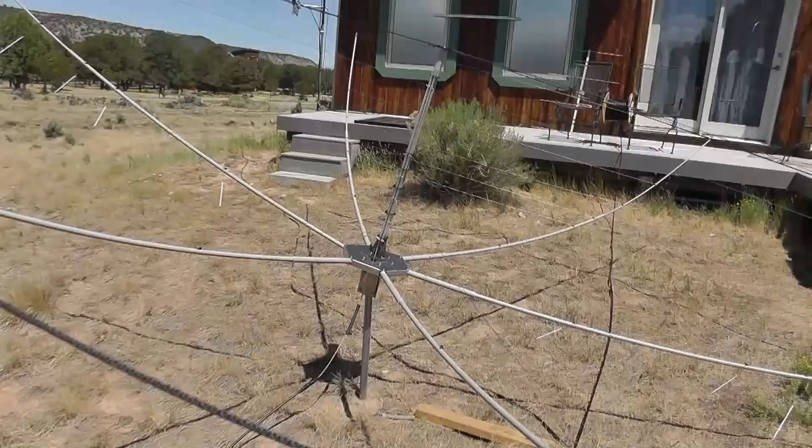Okay, so here's the antenna on the assembly stand. I've got it right here. It can rotate around. The feed point is right down here, and there's a transmission line that goes up the length of the antenna, and we start with the 6 meter, 10 meter, 12 meter, 15 meter, 17 meter, and 20 meter. Up here at the top we've got spacer cords that keep the ends pulled up.

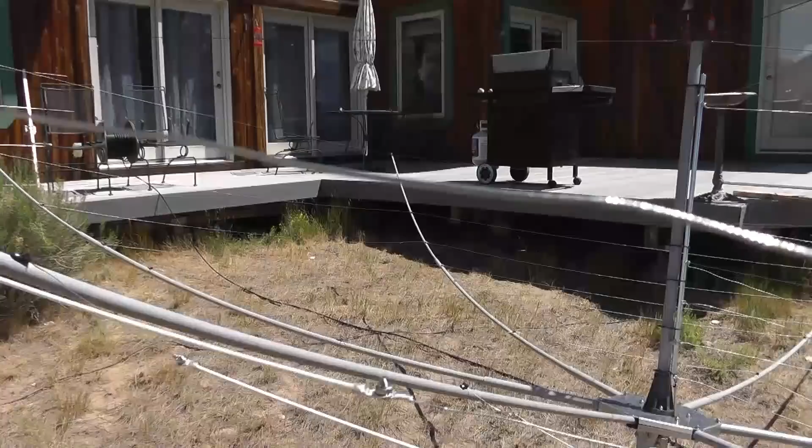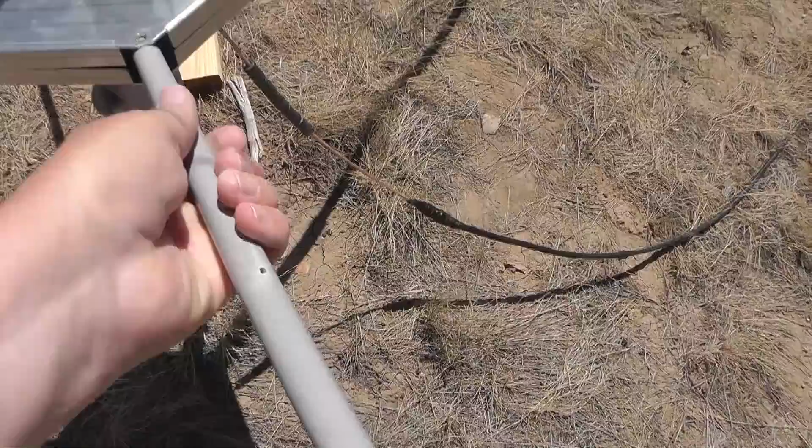Now the way these wires go is over here to the spreader element. Then from there are these insulators. Let me get up closer. Here's some insulators right here that are pre-made to the right length. And then over here is the reflector element. Now this thing is broken. I managed to break it off. See how this spreader arm comes in here? Well, it's supposed to come in here too, but that part is broken off. So I have a fix for that, and I will implement that.

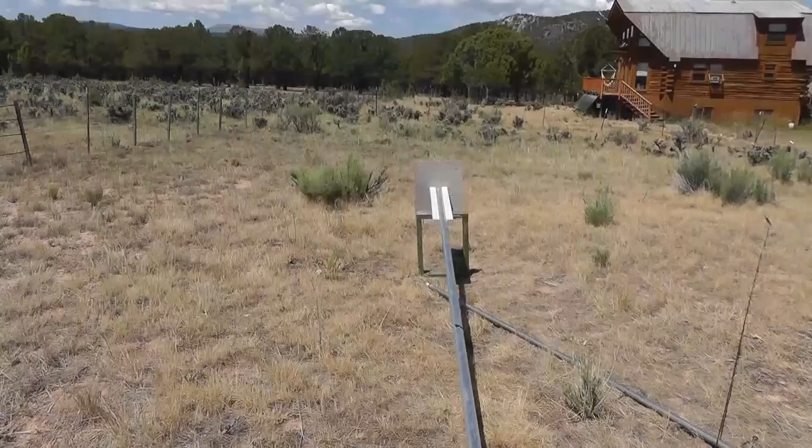In the meantime, here's the mast I'm going to put it on. That is a 20-foot long piece of Schedule 40 pipe with a 1.5 inch inner diameter, and I got the heavier aluminum, and it's all one piece, 20 feet long, so that it would hold up the higher weight. And what we have down here is a base for it.

Note the bolts. We can leave the top bolt in, take the bottom bolt out, and then it will swing up. So we put this on the ground, and with these 3-foot stakes that we have, connect that to the ground, and then the element folds down. We can put the antenna on it and then lift it up and get the guys in tight. So that is the plan as soon as I get the antenna fixed.

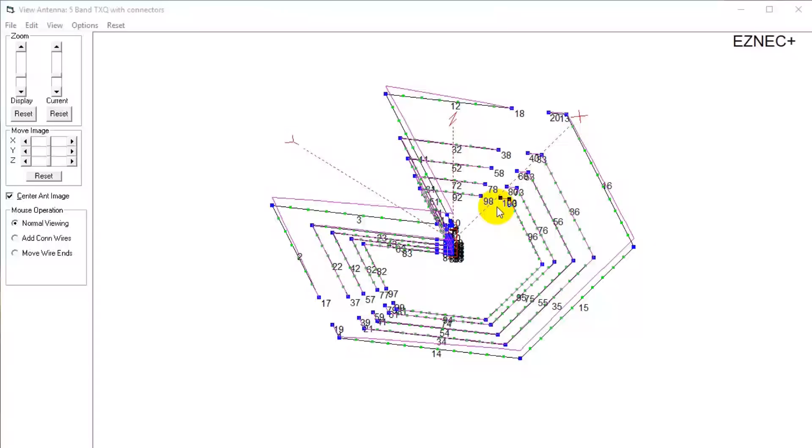Let's look at the overall model in EZNEC for the thing. You can recognize the pieces here. If I put this up here, like this, there. Okay, you can see the driven elements all follow this spreader out until they get to their turn point, and they come over here some distance away from the reflectors. These are the reflectors, so you can think of this as kind of a V shape, and these as sort of a U shape.

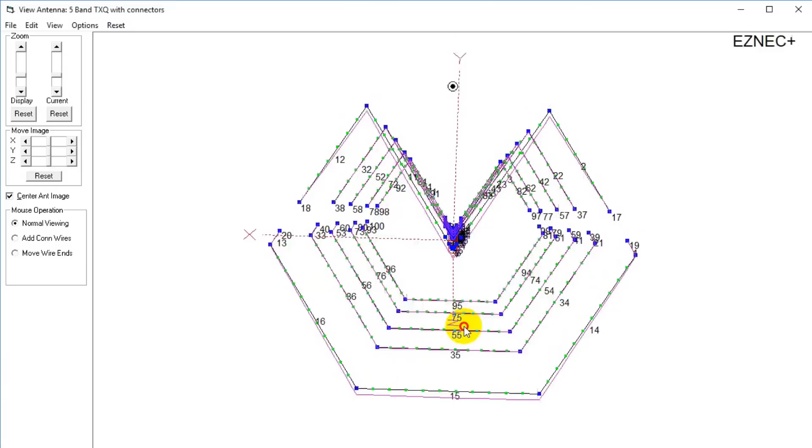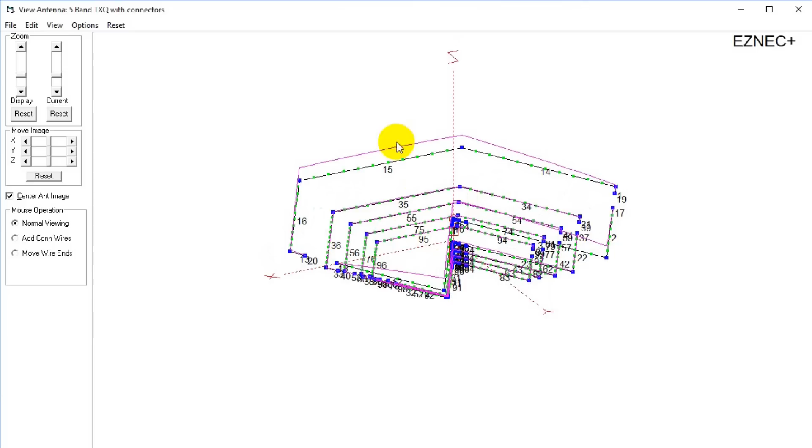Okay, and as we look at this antenna, you can see that the smaller loops are on the bottom of the antenna. Now that pink line right there is the current that's in this top element here, and it just shows that it's at most right here in the middle where you would expect it to be, and it is also highest out here in the reflector. So each driven element is on the same level with its reflector. Now there's not 6 meters on here. We've got 20, 17, 15, 12, and 10. So 5 bands right here.

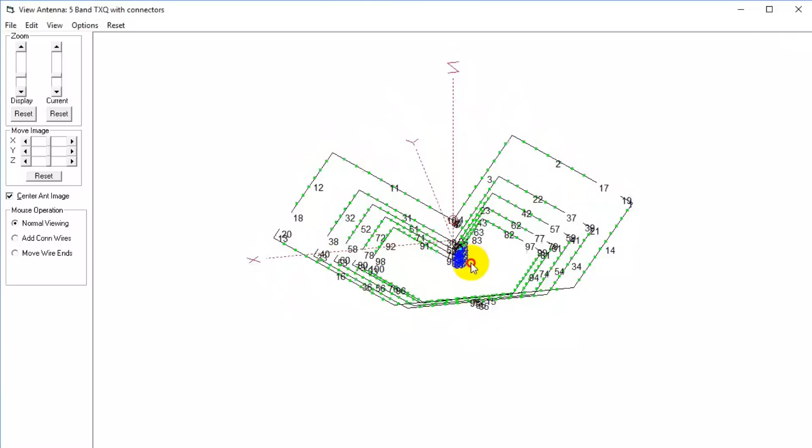Now we can look at various things about this. What I want to do is look at the SWR first for each of the 5 bands that's modeled here, and the elevation and azimuth patterns for each of them. We're looking at the radiation pattern of this antenna on 20 meters.

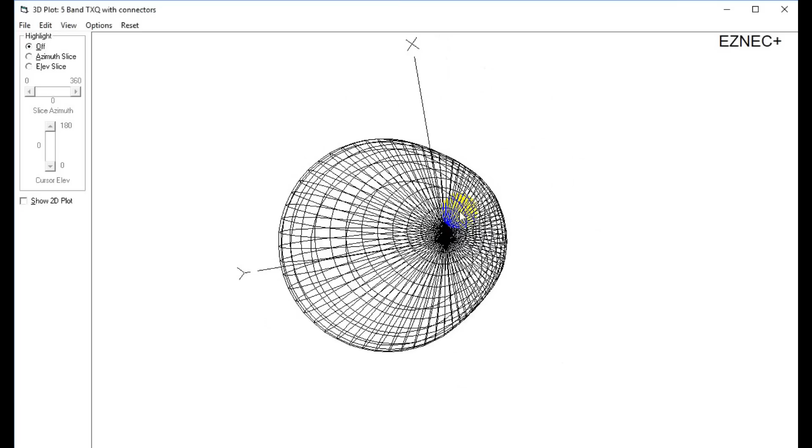Note that there's no weird side lobes or back lobes. There is a back lobe and a side lobe. You can see them here, but they're very smooth. I've never seen an antenna with such a smooth pattern. Note that the radiation does tend to go up. We're going to find that the peak is somewhat right in here.

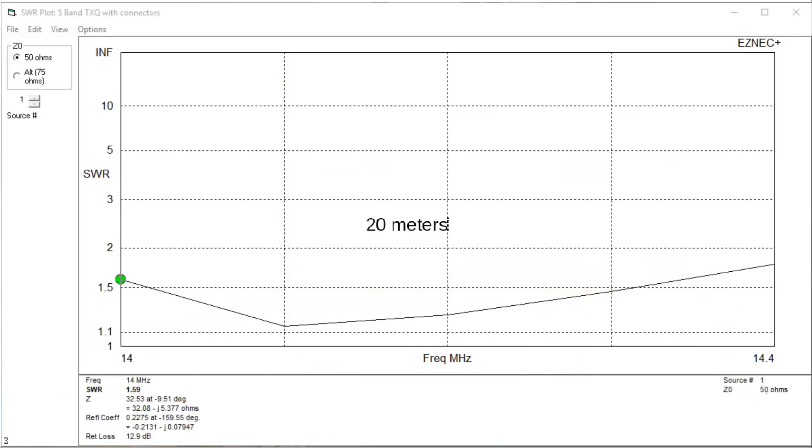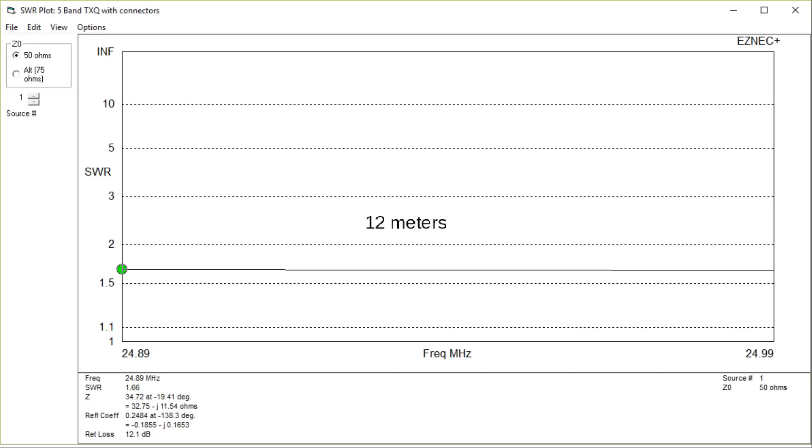So here's 20 meter SWR. It's below 2 to 1 across the band. 17 meter is very low. 15 meters is also very low across the entire band. 12 meters is very low. It's lower than 2 to 1. It's not less than 1.5 to 1. If you wanted to, you could use the built-in antenna tuner to touch that up.

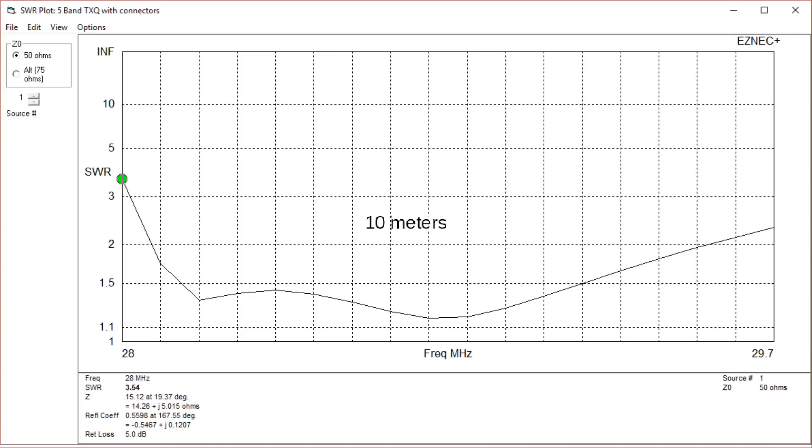10 meters is a very wide band, 28 to 29.7. The parts that are commonly used, which are 28.3 to 28.5, is where you'll find a lot of SSB activity, and a little bit from 28.5 to 28.6. And the SWR for that section is excellent.

Now let's look at some of the elevation and azimuth. Let's go back to 20 meters. We see that we have this nice rounded potato shape elevation pattern. The elevation pattern is high, like it would be for a dipole. Now we're at 20 feet, okay? The model is at 20 feet, and that is what I'm going to be erecting, a 20-foot mast. So we'll see how all of this comes out. So 20 meters optimum would be about 33 feet, but we don't have that in this case.

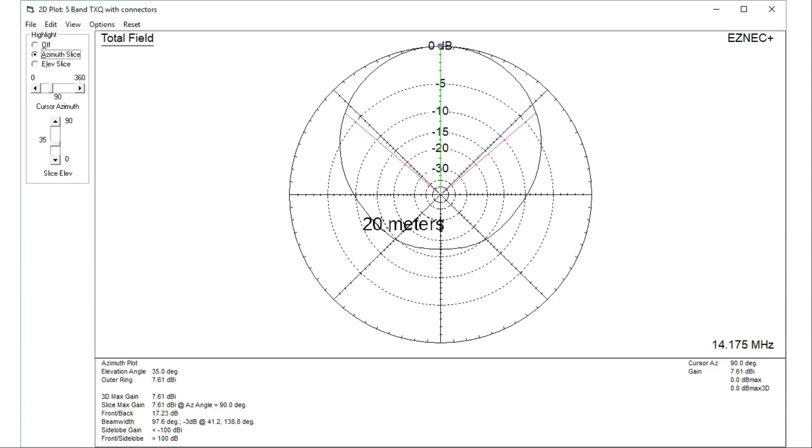If we look at the azimuth pattern, the actual 3 dB down point on this thing gives the beam width of 97.6 degrees, okay? And notice 7.61 dBi max, that's the outer circle, 7.61 dBi. That's still over 5 dB or a full S unit greater than a dipole. So that's pretty good. Here's 17 meters. Again, we've got the potato and same type of thing, same beam width on 17 meters.

Let's look now. Now, this is interesting. On 15 meters, you start to see a little baby bump on the potato up on the top. The reason is because we're now above the optimum height of half wavelength for 15 meters, and that would be 7.5 meters or about 20 feet or so, and we see it starting to form another lobe. And we'll see this as we go up higher in frequency, because that is sort of virtually raising the antenna in terms of wavelengths. Okay, still that same azimuth pattern.

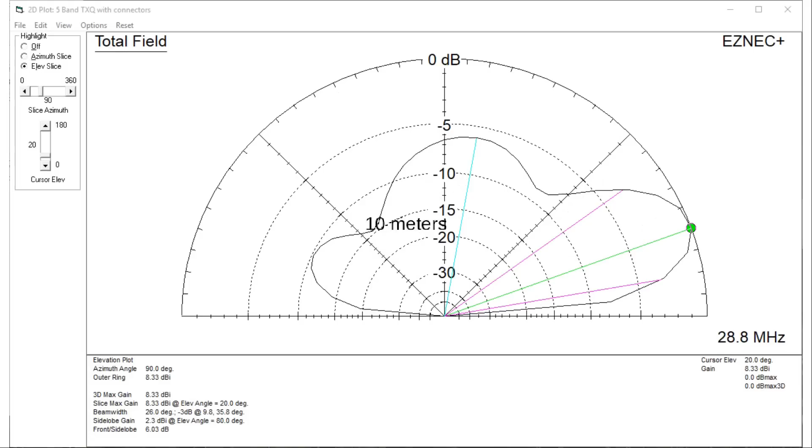Now here on 12 meters, we've got a pronounced baby bump. And if the antenna went up in frequency, we'd see more and more of a baby bump until we had 2 lobes, one higher than the other. 12 meters still has that same azimuth pattern, over 90 degrees. Now here on 10 meters, a very pronounced baby bump, and it would be on 6 meters too, except this model does not cover 6 meters. So here's the 10 meters right there.

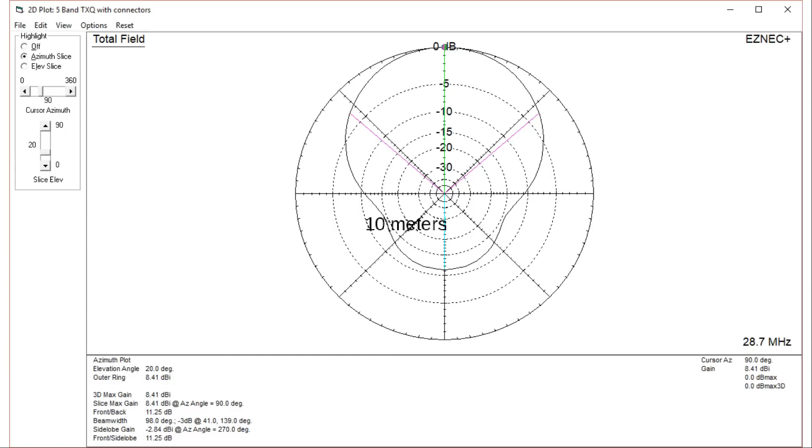So what we've looked at is the performance in terms of SWR and beam width, and it's outstanding. No surprises. And we'll see if we can verify that when we put up the antenna in the next couple days. Well, that's quite some performance for this antenna. It has one of the smoothest patterns I've ever seen without lots of little bumps and things kicking out. Has an excellent front to back ratio, excellent gain for a 2-element beam. Very novel design put together by G3TXQ, and very nicely done.

Now MFJ has added 6 meters to this design. It was not in the original G3TXQ design, and I think we'll find that it's just a great antenna. I've got great expectations for this antenna as soon as I get it up. I have to fabricate the workaround piece, put it in there, get some friends this time to help me put it up. Plus I've done some workarounds on the antenna mast that I've shown you. So should be a good thing. Next video I hope to report to you on how well it went, and we'll look at the Hex Beam on the air.